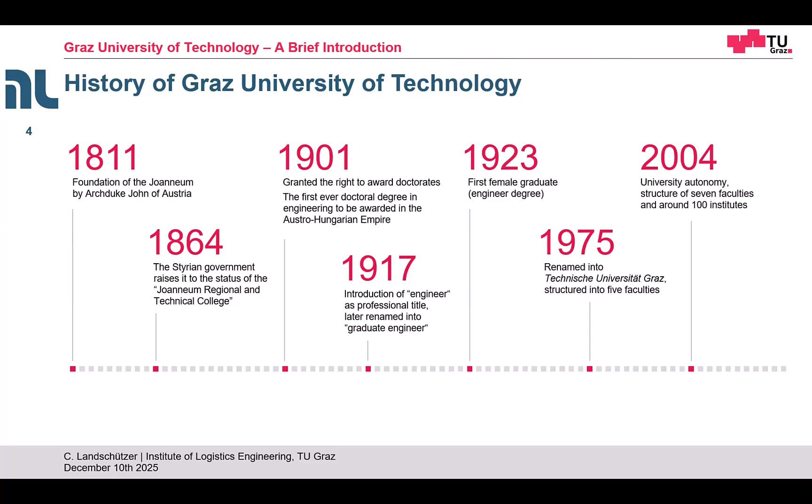We made some progress, and as you can see, we grew largely, being now 3,900 staff total at the university, with a federal budget of 209 million. That's, I think, a little bit, or much less than in Dortmund here.

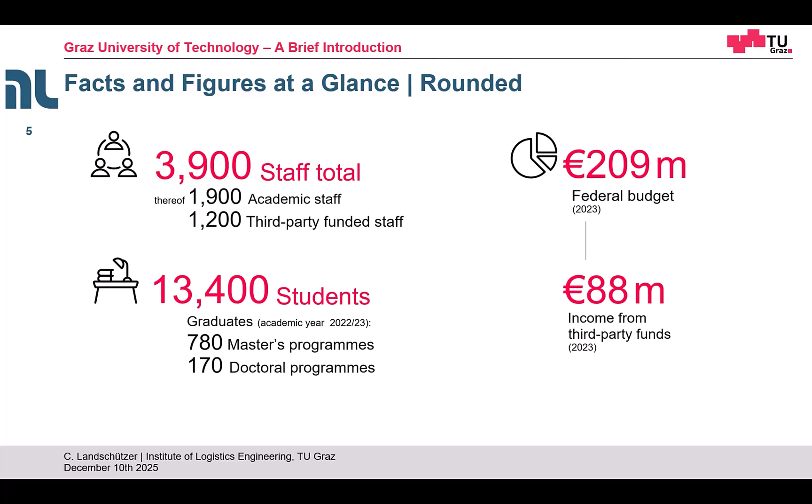But as you see a little bit later, we are a technical university, not a full university. So there are three more universities in Graz, two of them much larger than ours. This is split up in Austria. But in Austria, we only have two technical universities, and one of them is Graz.

What you can do when you come to studying, it's not so interesting for you. I think you're all beyond this stage. Many different degrees here, but here, this is the structure of the university.

We have 7 faculties, and as you can see now, architecture is maybe the most non-technical faculty here. The rest is informatics, construction engineering, machinery, and also some natural sciences.

From this mechanical engineering faculty, where I'm coming from, we have a lot of institutes, and here is this ITL - at least the logo is not the same as yours. We have different colors, but the same 3 letters. So this is our short history.

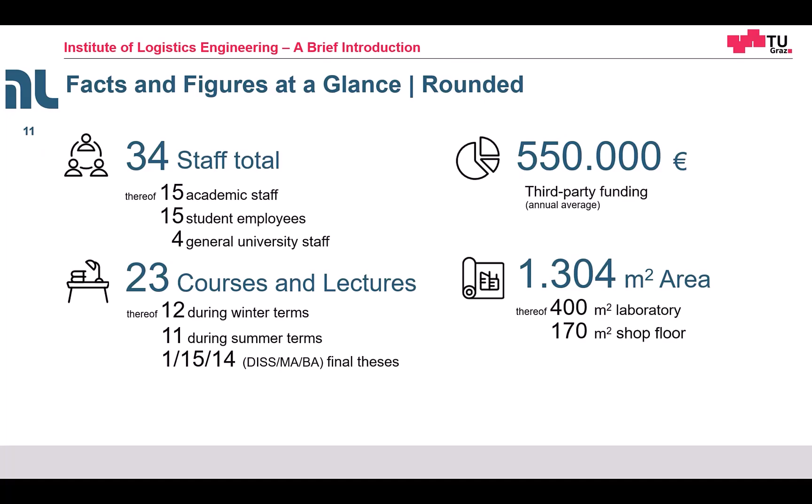Our institute has a total of 34 staff, a typical budget of €550,000 in third-party funding. Let me say, too many lectures because it's hard work here, and sometimes too little space. As you know, universities - it's always crucial to keep the space because everybody else needs it also.

This is what you can do in our lectures. Just a brief overview, not to avoid it.

Teaching is very essential, and I'm very proud to be honored - last week a colleague of mine did one of the best lectures last year. We got rank number 1 out of 4,000. It's lecturing.

From the university side, it's maybe not the same as research, but it's essential. We're here for teaching. We're here to motivate and to introduce people into science, and I think this is our DNA. Okay, so that's our institute and our understanding of logistics.

As you see, we are in the mechanical engineering faculty. We have a very focused mechanical engineering view on logistics, beginning on the structural level. Instead of the laser pointer here, I'm going to use the laser pointer from the computer. You see here? We're starting on the structural level.

This is all this network design, logistics and networks. This is why I'm here, probably today, for the rigorosum of Marius Delbrücke, from logistics modeling and material flow calculation. So that's the high-level view of logistics, going down to the system and up to the device level.

So we're the engineers that are engineering machinery, building machinery, selling machinery. As Graz, maybe you do not know, is one of the intralogistics hotspots in Europe. We have 2 large producers - I can say their names.

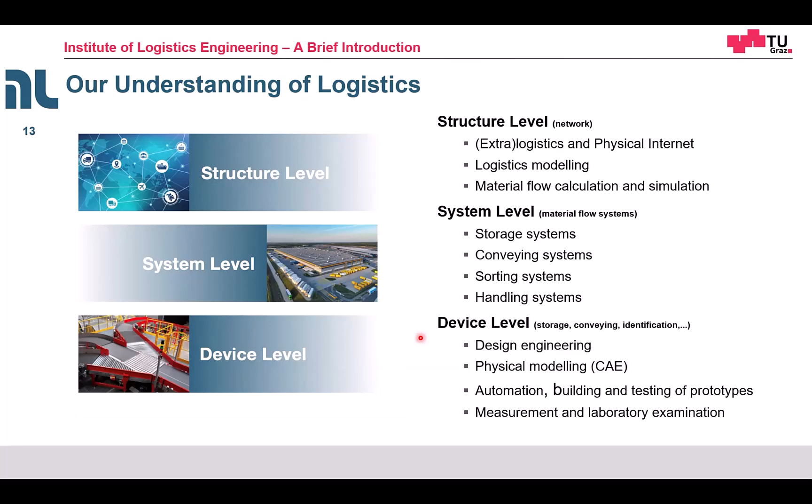And this is where we are connected on this device level. This is design engineering, modeling, automation, measurement, optimization, and of course also programming and IT. This is accumulating in 4 research fields.

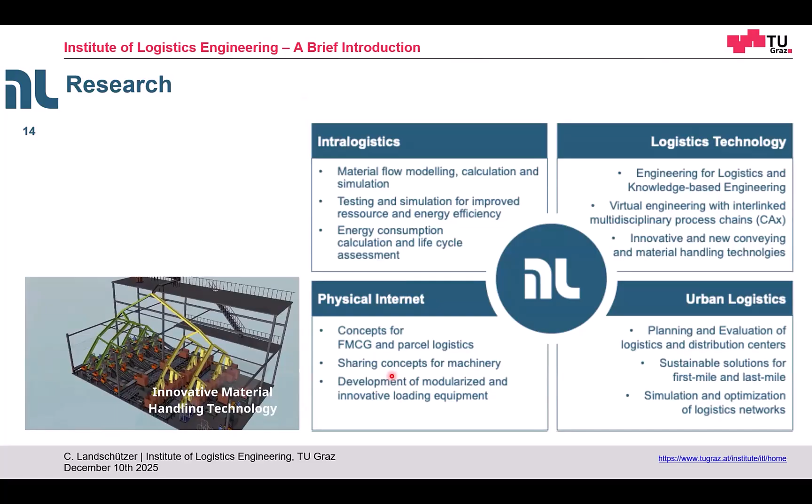Just a little introduction video running here by side. I'm not going to explain everything in detail, but my focus areas are a little bit more on the higher level - it's intralogistics and logistics technology here. With logistics technology, we have methods for designing and optimizing intralogistics machinery. This is closely connected to engineering and product development.

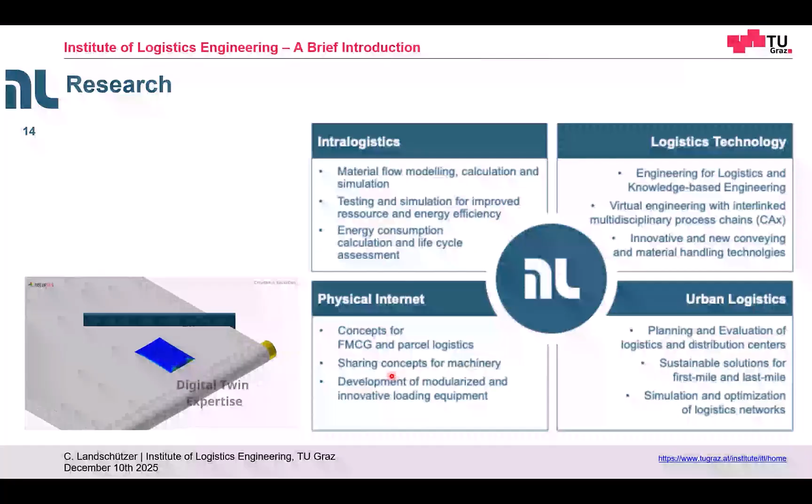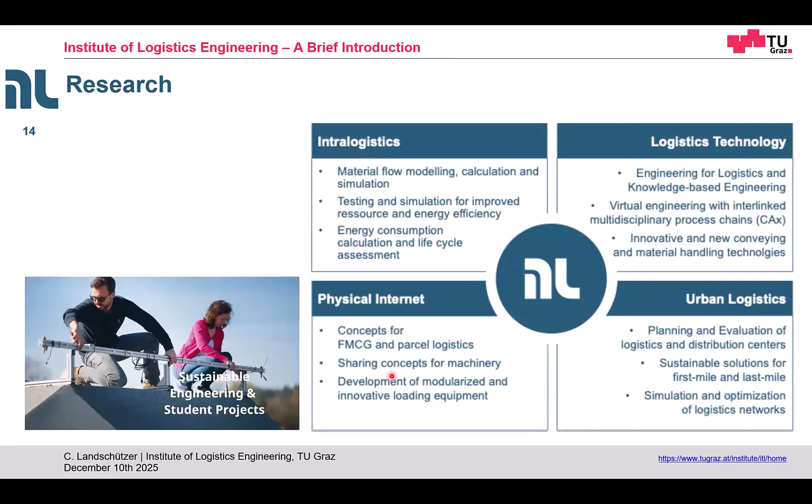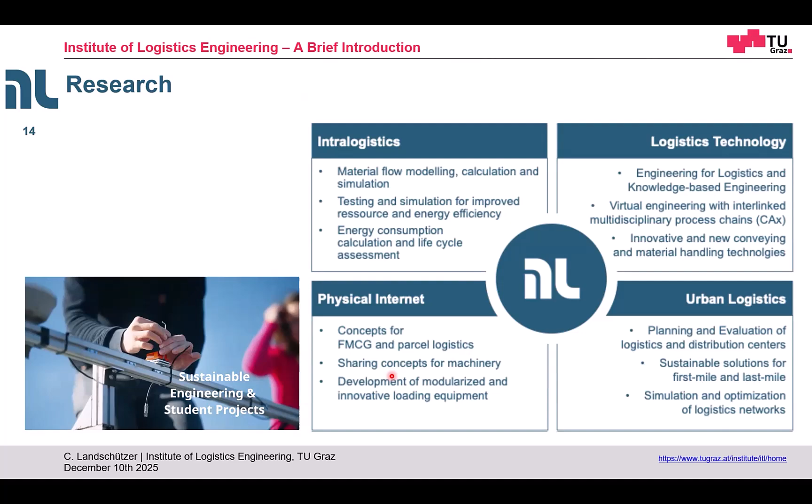Taking some synergies from the automotive and aerospace branch, which is also very large in Graz University of Technology, this culminates in intralogistics, where we focus on material flow modeling, testing and simulation, and energy consumption methods. What you see in the video, I'll pick out a few examples later so we can go into more detail.

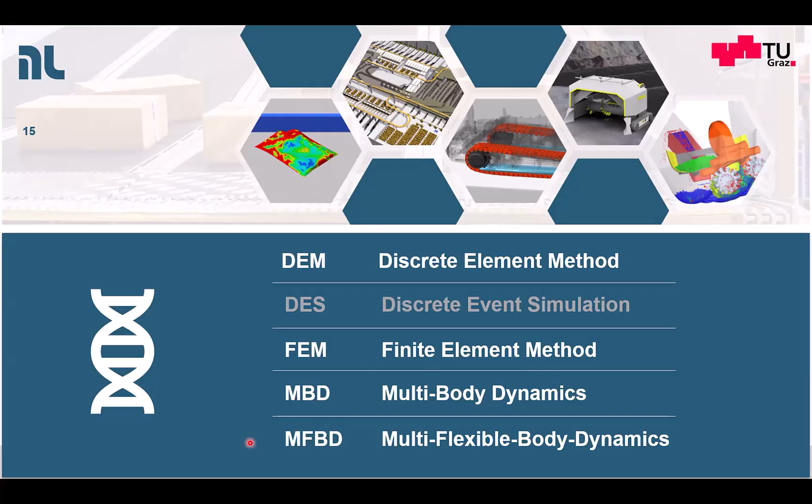So our DNA, and what I'm talking about today, is simulation and the virtual side of engineering technology. Some abbreviations I'll use: discrete element method, finite element method, multi-body dynamics, and multi-flexible body dynamics. This is essential to describe the physical side of moving goods - the acceleration on the good, the acting forces, how goods interact. We need all these methods to make virtual tests and build digital twins to optimize machinery.

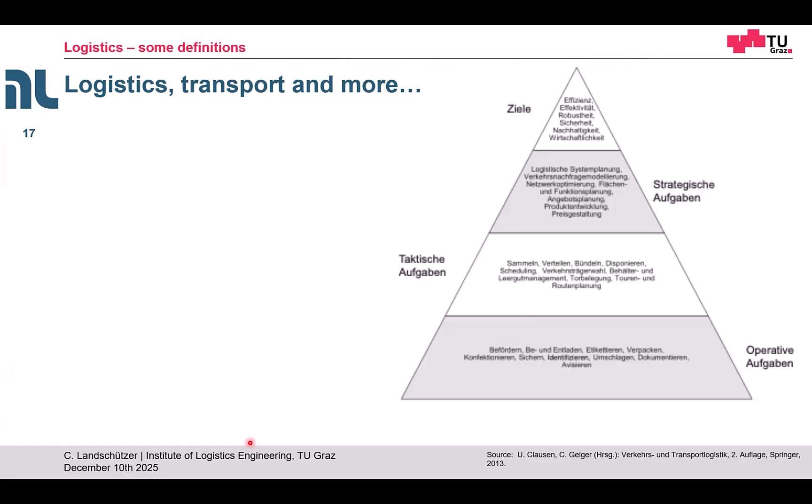Back to the title, Beyond Mass, Form and Transit Time. When we look at logistics, transport and more, I think every good lecture should start with some theory. I found a picture you may know, dear Uwe. What is logistics and what makes logistics? My view is, yes, as you wrote in your book, fulfilling comprehensive goals by managing strategic, tactical, and operational tasks.

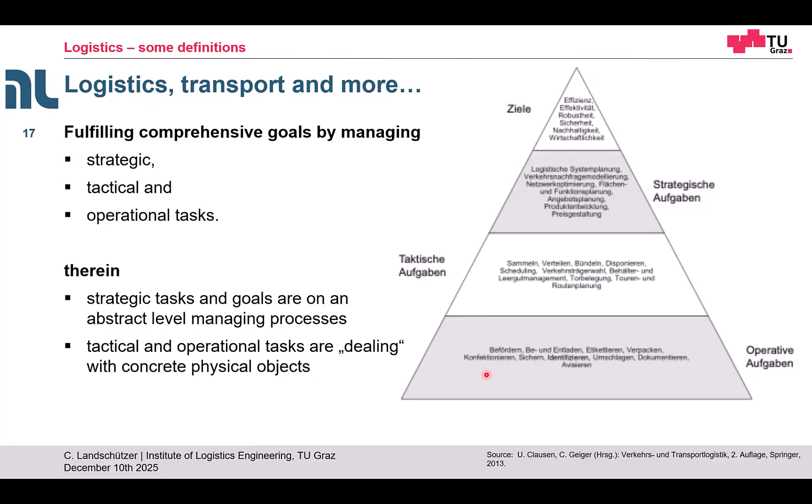But how we manage and deal with this task is a bit different, because strategic tasks and goals are on the abstract level, more a process view. Tactical and operational tasks deal with concrete physical objects. Here it's in German, but we have conveying, loading, unloading, packaging, handling, and so on.

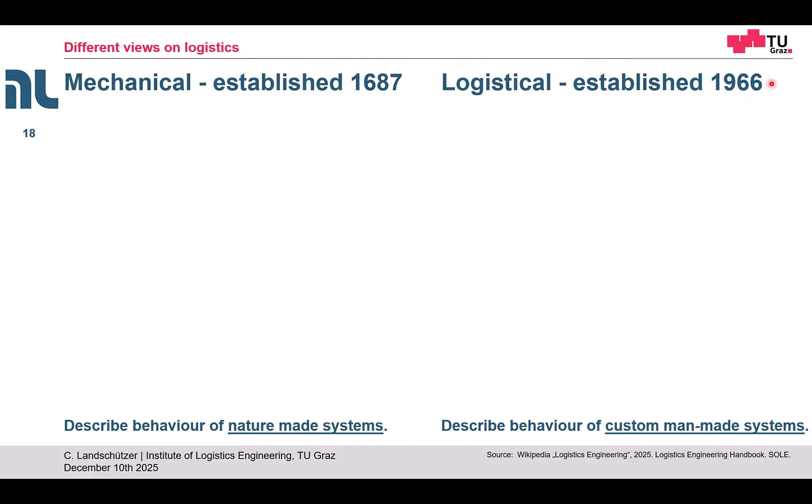Every time we have a concrete physical product that we have to touch and move somewhere, and with these different views we have on one side a mechanical view - I wrote down the number 1687. Any idea where this is coming from? Newton's laws, yes, 17th century. And I wrote down logistical view, 1966 - this was the founding year of SOLE, the Society of Logistics Engineers. This mechanical view and this logistical view on moving goods are a bit different.

Where the mechanical view is physics-based, we sometimes struggle to exactly describe the physical behavior of the goods because we have missing models. I can describe the movement if I let my presenter drop here, but if I want to describe the impact when it touches the floor or the table, maybe there aren't enough physical models behind it, or they're too extensive or complicated to use in detail.

So we have highly interdisciplinary fields here. We connect mechanics, thermodynamics, electrics, aerodynamics, and so on, because all these physical domains act on a moving body. We're talking about nothing more and nothing less than the physical moving body.

Software here has been used since the 1960s. This product, Adams, that I wrote down here, was developed for - what do you think - 1960s rocket design for the Saturn V rocket. So managing the dynamics of a moving rocket, this was the development stage of this software.

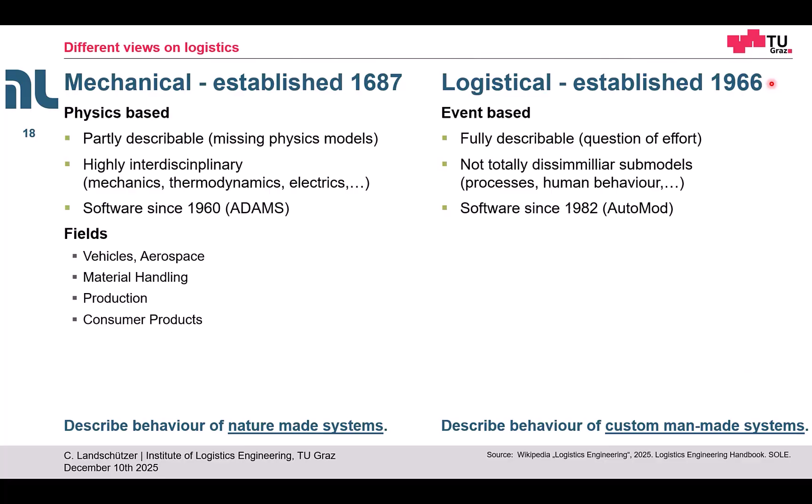With these fields, mechanical engineering, the mechanical view comes from vehicles and aerospace, culminating in material handling, production, and consumer products. On the other side, we have fields much broader on the logistical side, like customer service. This is from a logistics engineering handbook, and you're not expected to know everything written here - it's just a small view of what is covered by logistics engineering.

But we can take another point of view on this topic. Let's see what happens on the negative side - what's the impact if we do not handle mechanics in the right way?

We have probably still standing machines because something is broken. We have maybe sometimes serious injury, because machinery is not working as it should. On the other side, if a process-controlled logistical system is not working, we have probably uneconomic behavior, up to systems out of order. But we don't have this mechanical impact on this side.

And I think that's summarizing it a little bit. On this mechanical side, we describe the nature of the behavior of nature-made systems - this is all natural science. And we describe custom man-made systems, because it is designed only by our thoughts and not by the laws of physics.

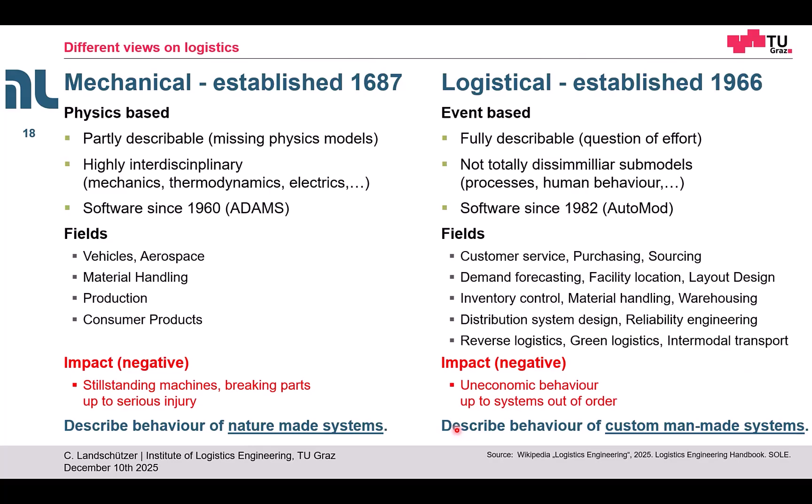Diving a little bit deeper into physics and physical modeling would mean to model the interchange and the atomic forces on a molecular level, if you have to describe the movement and interaction of any physical body with its environment perfectly. But we have to cut it somewhere, because it's important that it is handleable and that you can at least at the end solve everything you're going to model.

But I hope some pictures will tell more than 1,000 words now. You know the right side - it's a simulation of an intralogistics sortation facility, made in Plant Simulation, event-based simulation. On the left side, I have some physical simulation examples - what happens if parcels are on a conveyor, or what could happen. So if I only say it's enough to model that this conveyor takes 5 seconds from A to B...

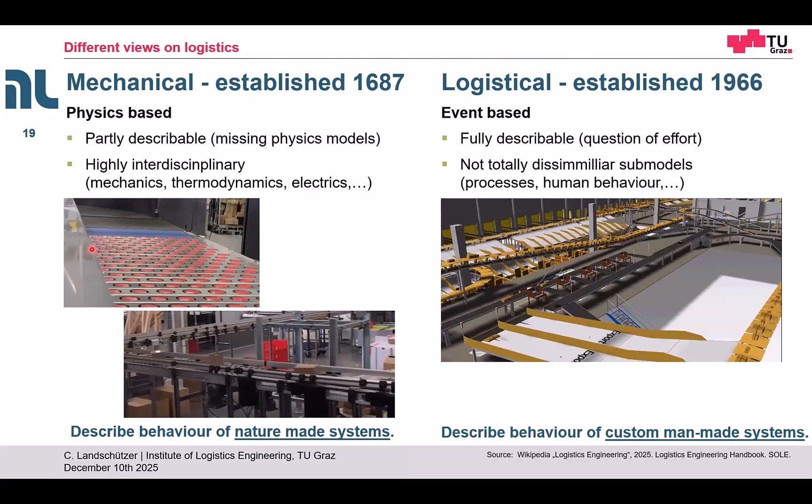Maybe something in between can happen - look at the behavior of this parcel here, the roller transfer. Of course it's reaching its destination, but it maybe takes some milliseconds longer than estimated, because you never modeled this physical behavior before. And yes, we're talking about milliseconds or 0.1 second. But if you enter a transit time or production time, you enter some digits and you have to know how accurate your time is, if you want to address and simulate the whole behavior accordingly at the right accuracy.

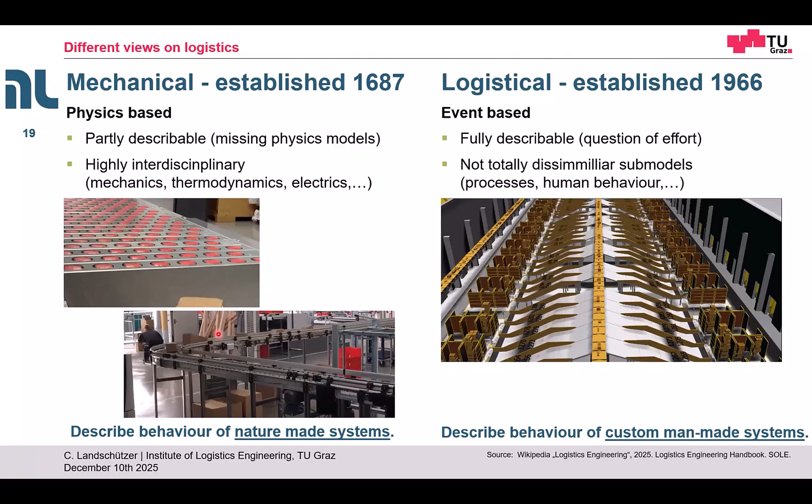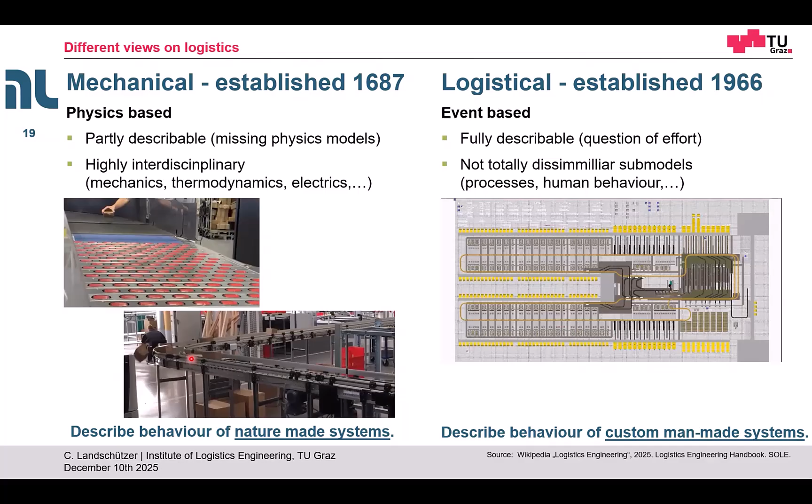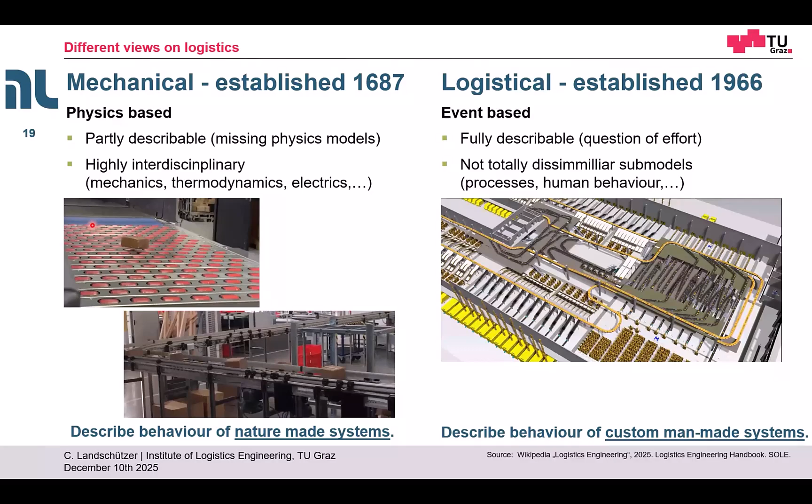Okay, the same happens on this transfer here. It's not a question of does it take longer or not longer - at the end it's not coming out right, because nobody designed this roller conveyor for packaging and parcels that look like this, nobody also designed this conveyor for some small consignments like this. So we have a large shift in parcels and packaging that is on conveying technology and handled with conveying technology. I'm going to show you a little bit more in some practical examples later.

Okay, so summarizing: dynamics and the mechanical view of logistics means a local and a global view on the behavior. It means we need dimensions, masses, inertias, elasticities, the dynamics of the moving goods, and we have the global interaction - elasticity, interaction, friction, and environmental parameters that all influence the behavior of a moving good. It's not important if it is a sea container or a small consignment from Courier Express branch - it is partly describable as accurate as necessary, but not fully describable.

And on this logistical side, we have an abstract view of a large network that is mainly characterized by arrival times and quantities. These are the physical entities you need here.

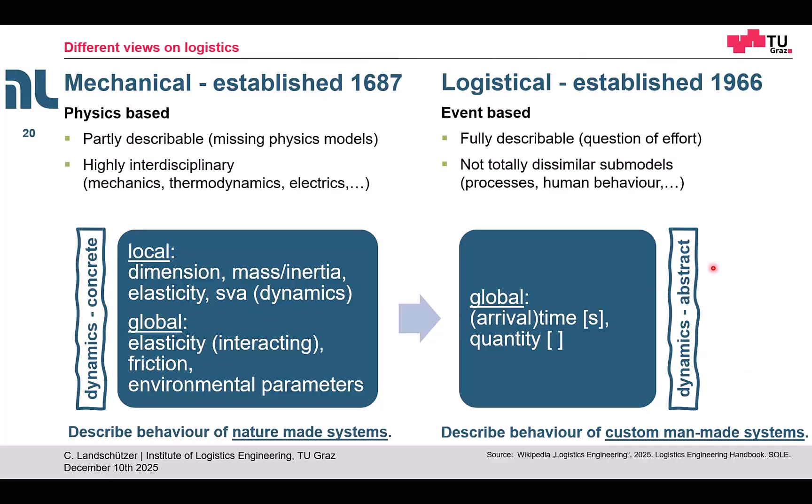Okay, so far so good. That's the theoretical part. I'm going a little bit more into details and showing you what I dealt with in my last 10 years, to make this mechanical side a little bit more solvable.

Yes, I took the approach to find the transfer of CAE methods - computer-aided engineering methods - from product development to logistics engineering. As you know, your consumer products, cars, planes, even trains are engineered at a much more sophisticated level than our conveyors, cranes, and material handling equipment. So I took this approach and showed these branches - what are your methods, what is your software, what is your approach to describe this behavior, and is it possible to make a transfer?

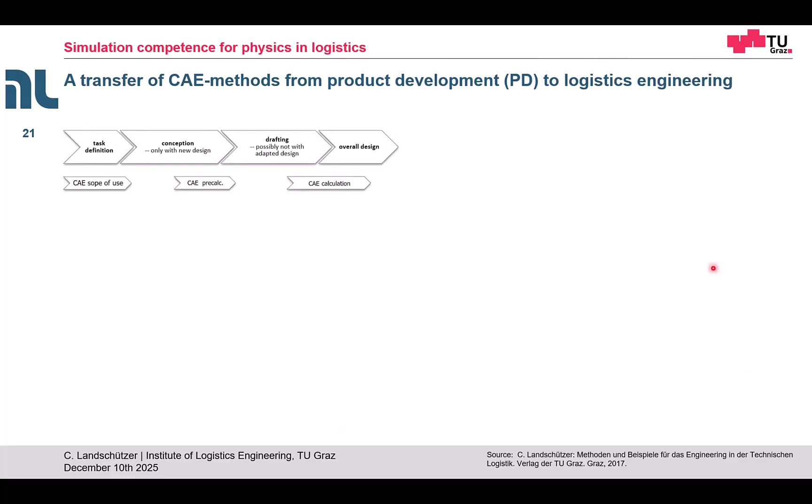Not to go into detail, it's just some excerpt of my work. And yes, there are some dedicated process chains, for example to build up digital twins for predictive maintenance, that are managing the complex dynamics of goods in product development and in operation, and to sharpen these essential parameters that you need when you take a more abstract view and develop some process chains.

Not to bore you with pictures, the sources are at the bottom if you're interested in how this transfers from trendsetter branches - I call them that because their product development is far more advanced than we are in logistics engineering. That doesn't mean one is better and the other weaker, but the effort is completely different. The engineering department of a large car producer is much larger than all the intralogistics producers combined, so we have a different level of theory and application of modern methods here.

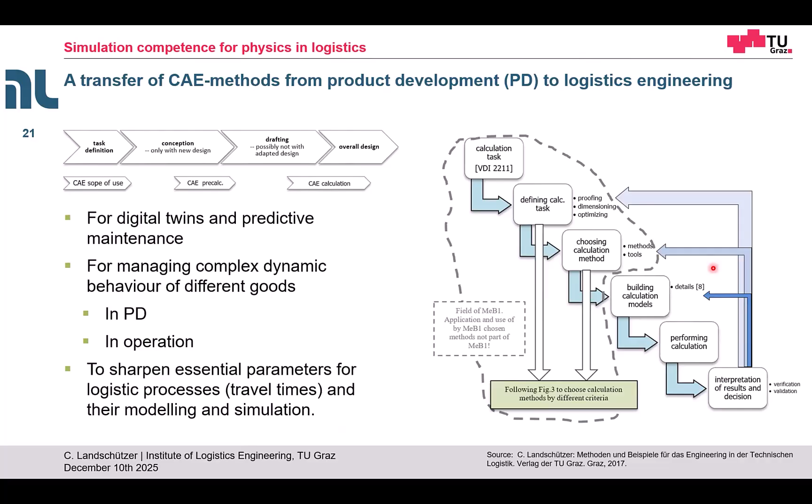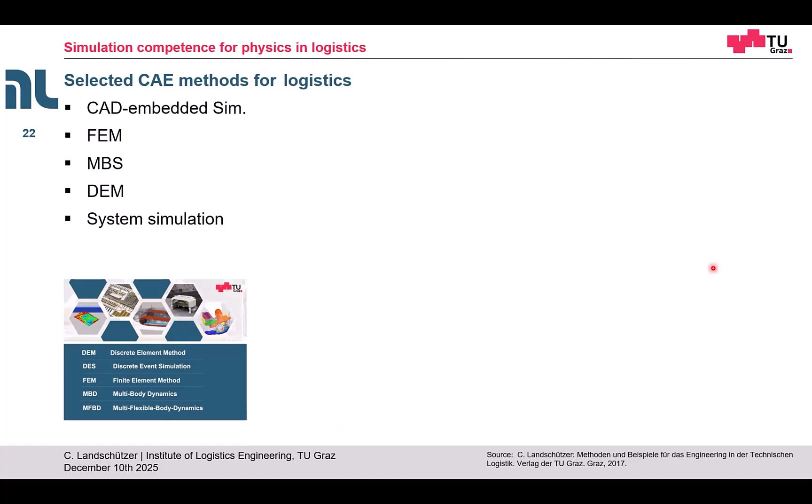Okay, some selected methods - I showed you this picture a little bit earlier, you probably remember all these abbreviations. But what are we going to do when we use these methods for logistics and for design of conveyors, material handling machinery, and so on? We have some challenges to handle.

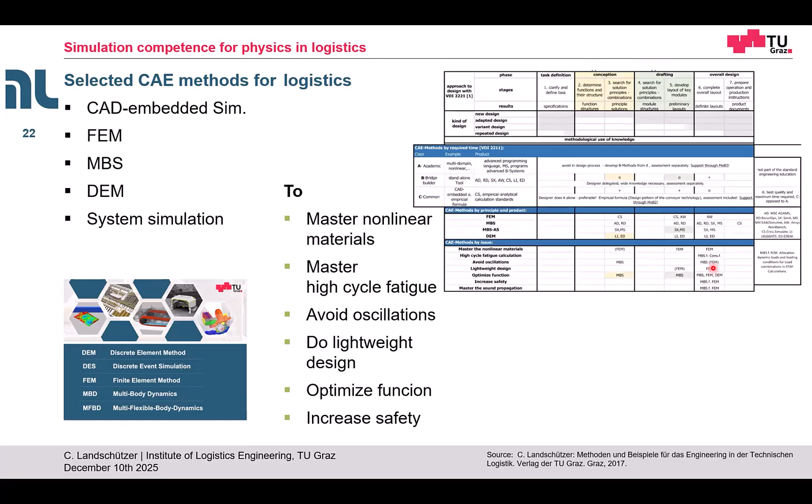We have to master non-linear material, and I'm going to show you what that means. Every consignment, every parcel you order is highly non-linear - the carton crashes, it changes its shape when you touch it. This is really hard to describe, but it's essential. Remember the jumping parcel on the conveyor - if I cannot describe the interaction, I cannot understand its behavior. And yes, we can answer this, and this is also out of my research, but I don't want to detail it here because I want to show you some examples.

My first example is from automated logwood handling. Austria is a country full of trees. Germany also has a lot of forests and trees, but we have a really big wood industry in Austria.

What this has to do with logistics is, you have to bring the trees out of the forests to the sawmills or to the producers. And there comes the topography in Austria - it's mountains, it's winter, it's hard to harvest them, it's hard to transport them. You have to load them, you have to unload them. And there is much potential for automation because we have a task that is highly risky and very dangerous.

This logwood handling is highly risky, physically demanding work, and we have a shortage of workers. We have this very dangerous work, and therefore high potential for automation - not only for the handling, but also for the self-driving truck into the forest.

There are some ongoing research projects at the institute - just last half year we ran a large project called COMET. It's one of the largest Austrian research projects, where we're dealing with the complete truck, how you can handle these logwoods automatically.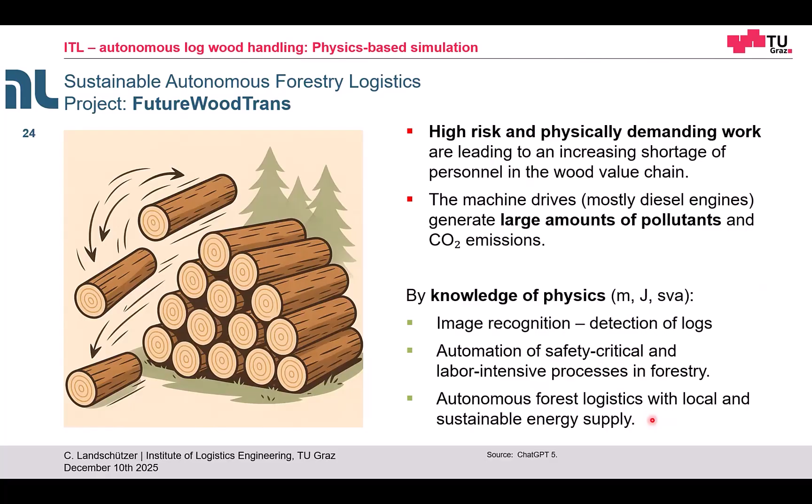We need automation of safety-critical and labor-intensive processes in forests, and we do autonomous forest logistics if we can describe all this physics. This is what I'm showing you now - this is a typical loading process.

Now, a question for the auditorium: where is the difference? The most essential difference, of course - this one is a picture, here is a simulation screenshot, but something is missing at the right side. Yes, thank you, of course - the operator here is missing, and the cabin is missing, because the crane is doing this work automatically.

Not to promise too much, we can do it now - we are not as fast as the good operator, but we can do it. And at this time, when we are doing it, the operator can do something else - having lunch, or going to cut the next tree in the forest. And that's where this great automation potential is settled.

But why is the physics so important here? You see this crane - it's one of the biggest producers of logwood cranes, it's called Palfinger, maybe you've heard of them. It's an Austrian company.

They're producing for the whole world, and the market is really international. Modeling this crane is not as easy as it looks like. You can build a model, but then some questions arise.

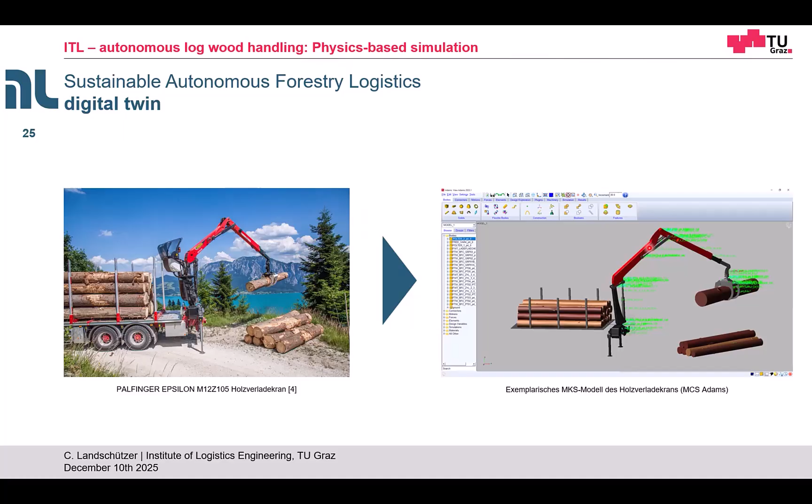What about this hydraulic cylinder here? How is its behavior, for example, when the oil is cold, when the oil is warm, when the oil is fresh, when the oil is not fresh? How is the behavior of this beam here? Is it rigid or is it elastic? All has to be considered in such a model.

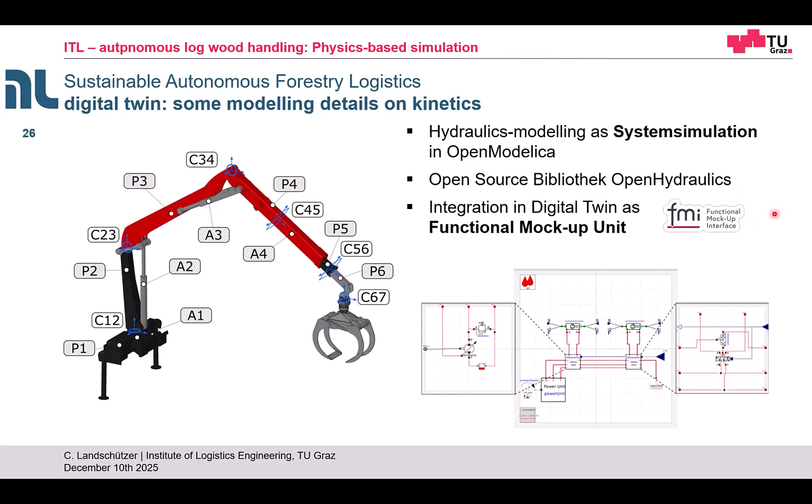Just some insights here on a very high level view. You see here all moving parts in this model, and the connection to the hydraulic simulation model. We have a key technology here, the functional mock-up interface, that connects different simulation domains. Remember, we talked about physics, mechanics, aerodynamics, thermodynamics, and so on. We have to connect them all. This is very well possible with the functional mock-up interface.

And we're going much more into detail. We are introducing non-rigid bodies here, because one of these logs has 400 kilograms. The crane picks up 2 or 3 of them, and it deforms elastically. We have to consider it, because if it's bending and I don't know how much it's bending, I never hit the target. So I have to describe this, and this is possible with modern engineering methods, but it's a question of effort — it's very time consuming and calculation intensive to make these simulations.

Some software products just mentioned here: MSC Marc comes from nonlinear material simulation, and it's very appropriate to model, for example, the behavior of this crane. But the key is in reducing these models. As I addressed in the beginning, it's not possible to model it completely or exactly. So we have to cut a certain layer and decide how much of this behavior of this very complex structure is interesting for me, and how much I have to consider so that the whole automation process runs.

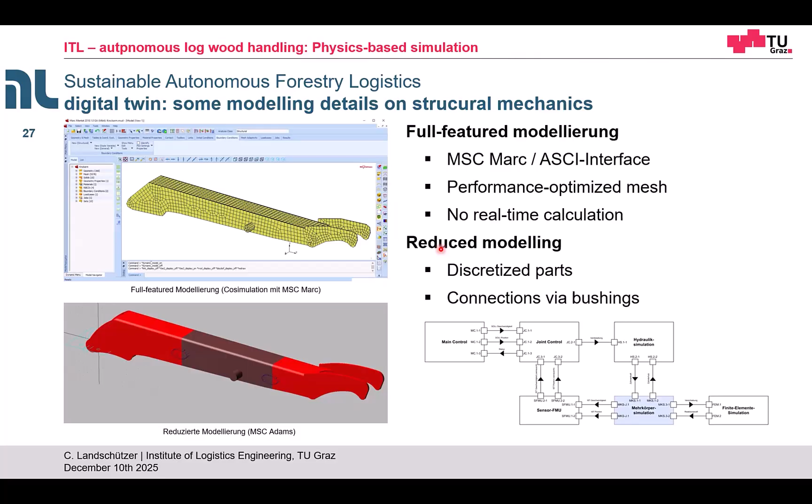Here are some insights into what we built in the control algorithms. It's not as sophisticated as what's behind it — this is the whole combination of different simulation domains, where this gripper here does its first movement on the screen.

Transferring it to the real operating crane is the other challenge. But this is one of the main advantages of virtual engineering: we can test much of our equipment, our processes, and our behavior on the screen. And it's not only faster and more performative, it's at the end more safe.

Because when we turned on the automation the first time on the crane, it made like this, and the exit button did not work. So we disconnected some of the computer cables so that it stopped again, because all this testing should happen on the virtual side.

You see the loading process here. You can tell me, okay, my computer animation also does this, and I have a computer game that looks like this, and it's the same.

We are not talking about visualization, we are talking about simulation. For me, it's important how large is the force here and how large is the acceleration here. It has not only to look good — it's the difference to some computer games where you see all these moving parts, also very performative running, for example, on your smartphone.

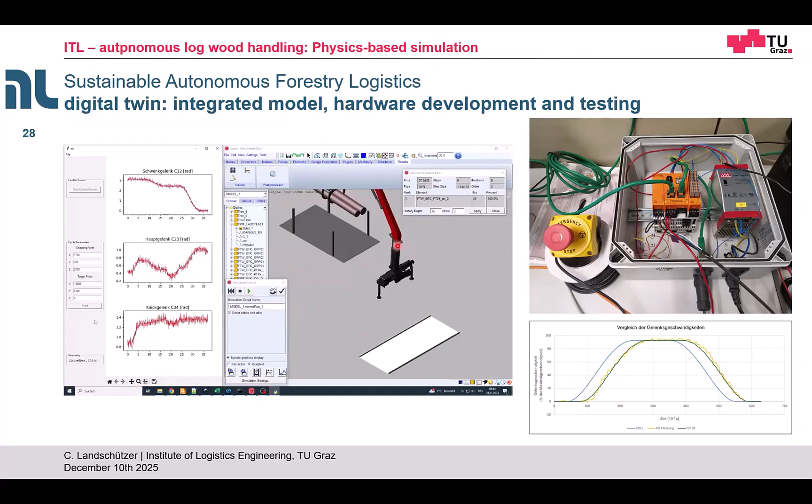This needs high performance computers, and I think this simulation model runs for 30 hours or more only to make one turn of this crane here.

He can do the work in the forest. He can do other work. What is his intention and what he is usually used for.

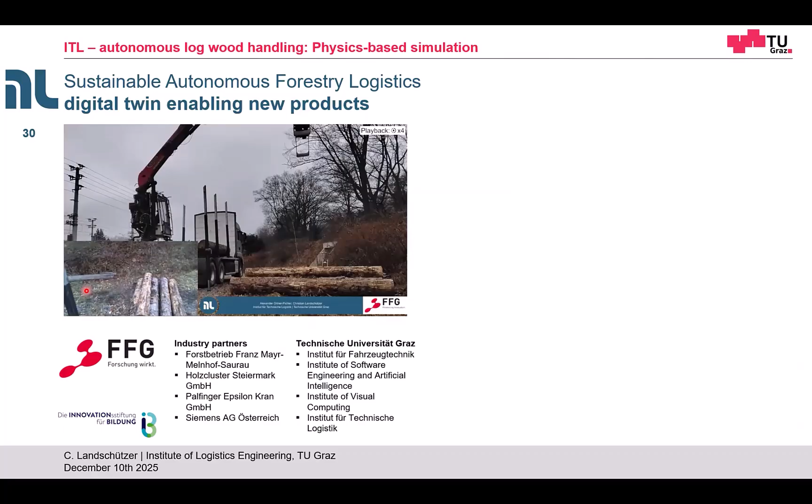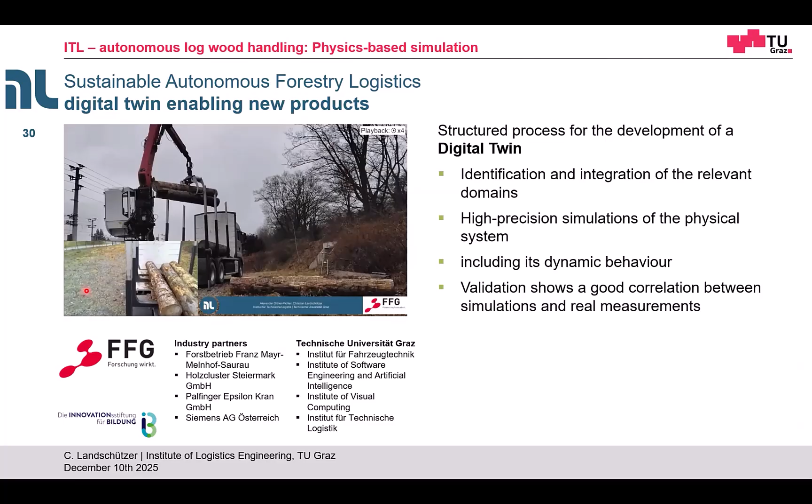So we developed in a structured process a digital twin, not only for the engineering and development process, but also for the automation process and software control at the end. This makes the process much more efficient, avoiding dangerous operations and using skilled workers for the skills they are usually employed for at the producer.

The digital twin here is a powerful development tool, reducing development time and costs, with early identification and correction of errors. I spoke about this turning crane - we did not find every error in advance, but we found many of them when we tested the automation.

We can simulate much more scenarios on the virtual side than in the forest, because we have more time, can use more computers in parallel, and have more abilities. The test stand is very expensive - we have to run the truck the whole time, and the truck cannot work in the forest at the same time. So once the model is ready, we have a big advantage.

What's the overall advantage of a digital twin?

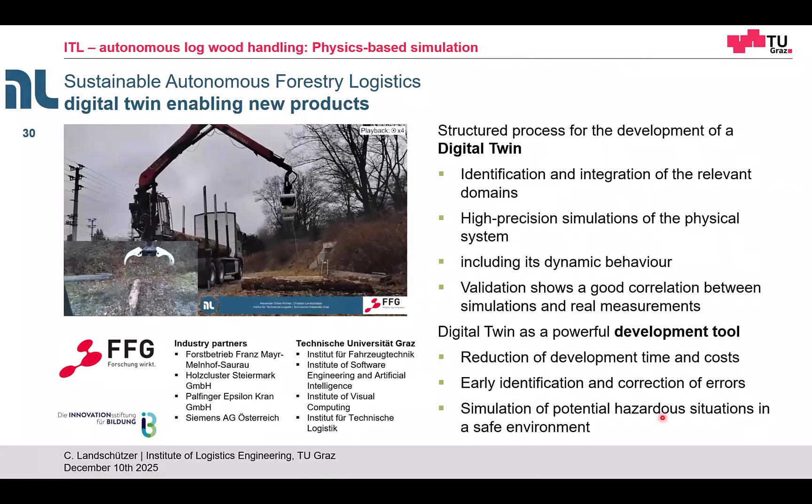My second example is about automated biomass handling. We're staying in the area of cranes, but moving from logwood to wood chips now. It's a Horizon project we have at the Institute. I'm not talking about all this in detail.

It's thermodynamics that involves burning wood chips, a very innovative process with a novel updraft gasifier connected to a heat pump, connected to gas reformation, using the ash as fertilizer, and so on. But that's not my domain.

My domain is providing this gasifier with fuel - we have to grip the wood chips and bring them to the burner. Conventional conveyors take what they get: you have the storage bunker filled with wood chips, and at the bottom you're pulling out what's lying there because you cannot choose. That's the conventional technology.

We found another approach, which I'll show you with a gripper, but we must also know some physics of our goods - we must know the mass, the humidity, and the ash content to provide the right quality at the right time with the right product.

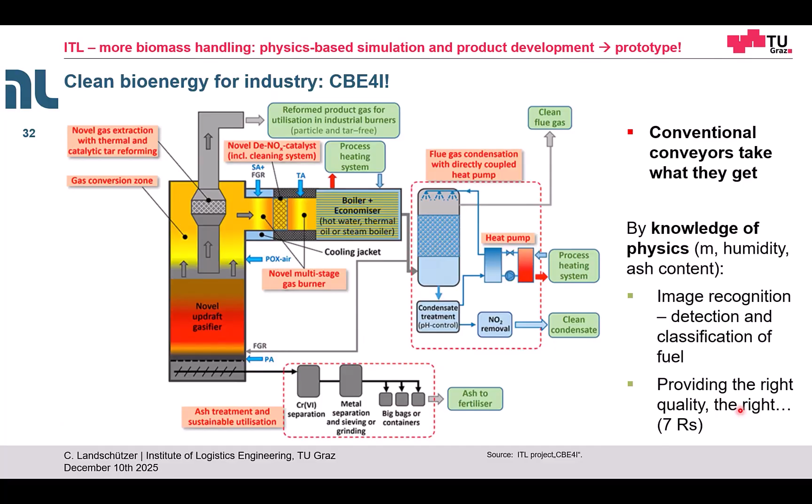Everybody knows that's a classic example. Instead of pulling out the wood chips at the bottom, we pick at the top, but we choose what we're picking because we can measure. Here is the good material, here's the wet material, here's the less good material. Let me show you how we're doing this.

This here is the automated gripper. It has a camera and a humidity detection system, and we have different storage bunkers. We grip from the top, we measure, and we sort. When the burner is not working at full operational load, we can use the gripper for sorting the material.

You never get homogeneous wood chips - you have material from one forest, from another forest, from one supplier, from another supplier, all different quality. But if you provide the burner with the right quality, you can improve the overall efficiency, the ash content, and all the emissions, because you can bring the right material for the right operational stage. For example, in full load you can burn everything, but in partial load you need the good material and you have to choose. This is what we're doing with this automated gripper.

This is done through the knowledge of physics, which is a little different here - the physics here are humidity and ash content. Maybe it's more chemistry than physics, but measuring this is the key of this automation concept. At the end, we developed this automation of the crane and the algorithm for how it mixes together to provide the right quality to the burner at the different stages of combustion.

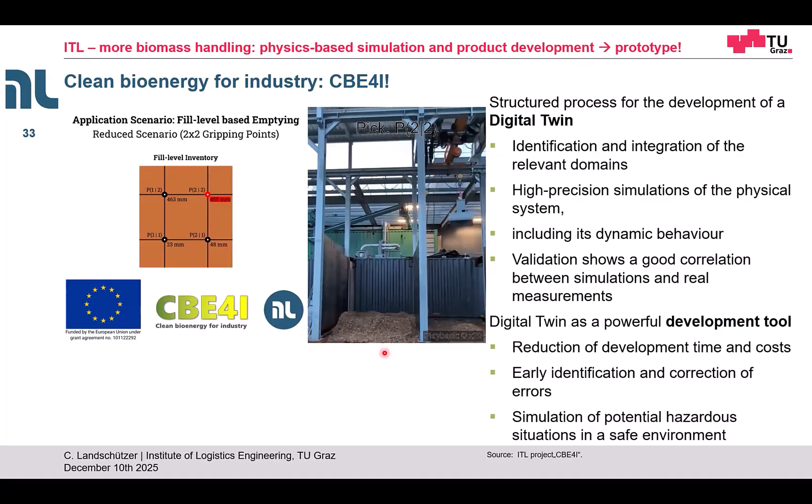My last example comes from the Courier Express branch and describes the dynamics of consignments, shipments, goods, parcels - call them how you want. If you look at the literature, you find many different words describing the same thing. For us, it's a parcel, or what you ordered yesterday. Why this is so important, I can show you in the next few slides.

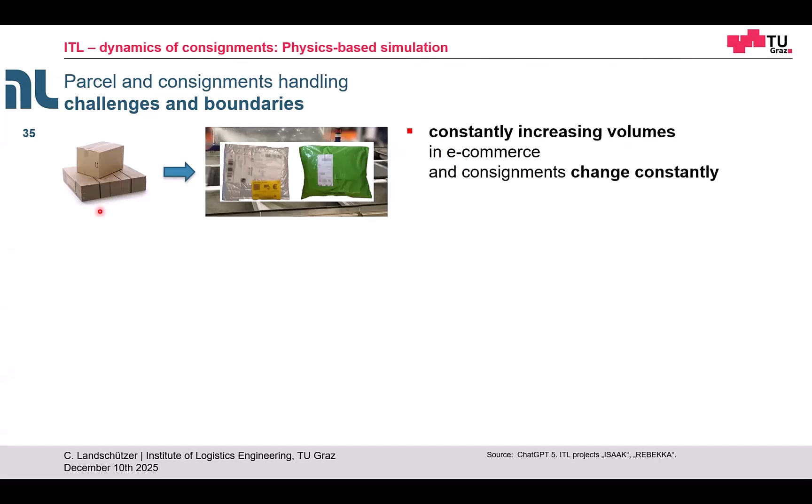With all this e-commerce boom, we have constantly increasing volumes, and the consignments change so rapidly that we cannot even describe them with words, let alone physics. Nobody knows how to name this parcel, the green one. Some say polybag, some say flat, some say Tüte, some say Plastiksackerl in Österreich. Some years ago, a parcel was a parcel - it was a six-sided carton.

And we have now dramatic change, nearly in a half a year cycle, from one consignment type to the other. I asked ChatGPT again to draw me a picture of loading and unloading parcels and sorting them - a little more interesting because they're dropping down from somewhere out of the truck, but it used different parcel types. This is why I used it here for my presentation.

But why is the knowledge of physics here so important, and which physical parameters do we have to know? First, like everybody would assume, mass. Mass of the consignment is what you're paying for. If you go to the postal office with your shipment, they lay it on a scale and say, okay, X kilogram makes so much euros.

But there is something more. For example, J is the moment of inertia, its resistance to movement. It's something more - what about the flexibility of the parcel? Some years ago, parcels, I told you, were cartons, and cartons were treated as perfectly stable, or elastic. But these consignments are not elastic - once you touch them, they lose their shape and never return to the same shape.

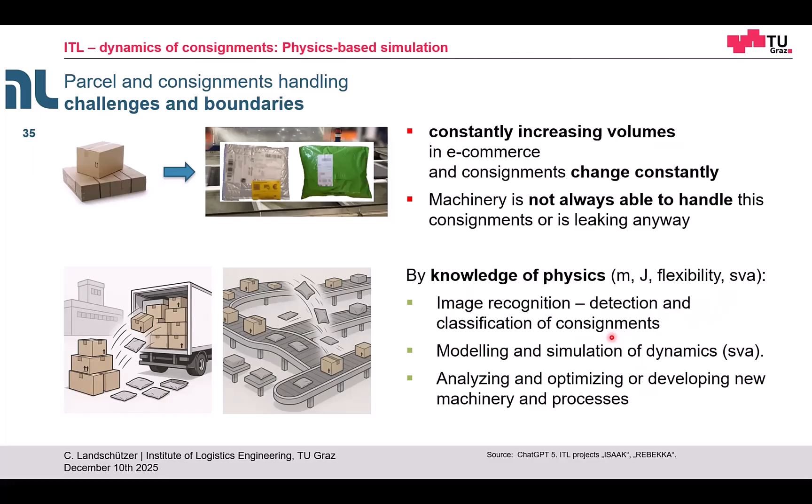This is non-linearity. So if we want to provide all the processes with image recognition for detection and classification, if we want to build new optimized machinery that has never existed for handling consignments like this - because existing machinery was all developed for six-sided carton puzzles - we need to describe the physics. We have now our third research project in Graz describing the physics of moving goods, and I hope my next pictures will show you what I'm speaking about.

That's what Courier Express companies have to deal with - those are polybags, as we call them, and we defined in a research article what a polybag is. They come as bulk material - you have a container full of bulky polybags. You load them out onto a conveyor, and what's the behavior of this bulk of parcels? Nobody can describe it so far.

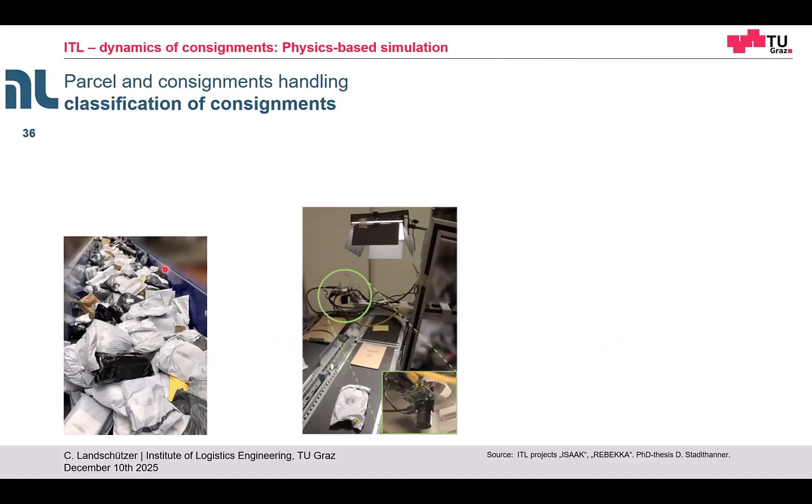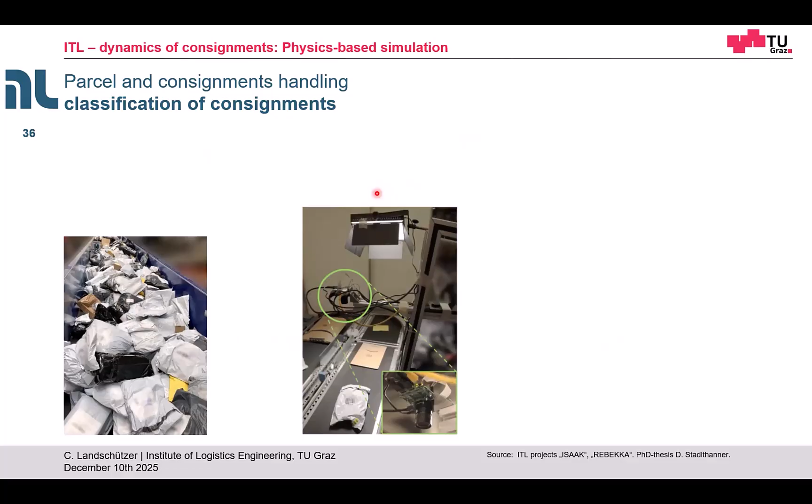But when you want to design it, you have to classify them beforehand, because not every polybag is non-linear in the same dimension - one is more rigid, one is more stiff, one is perfectly linear, one is non-linear. This is our first approach here: we developed an algorithm to classify shipments. This is what came out.

We classify them by shape, by dimensions, by another shape parameter, and so on. It's just one side, but you see here the different examples of shape when you have to classify them, and we do it by image recognition. We trained an algorithm to distinguish between carton and polybag, flat and round, and so on, so that we can say, okay, in this bulk I have X polybags of polyurethane, for example, and Y polybags of flat carton. This classification comes before optimization, because the physical behavior of these classes is highly different.

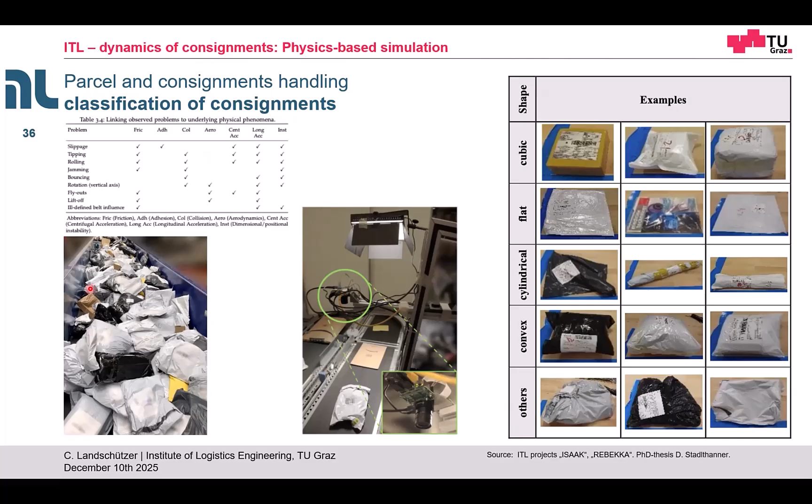This is one picture from the ongoing PhD. One of my candidates is going to finish next week.

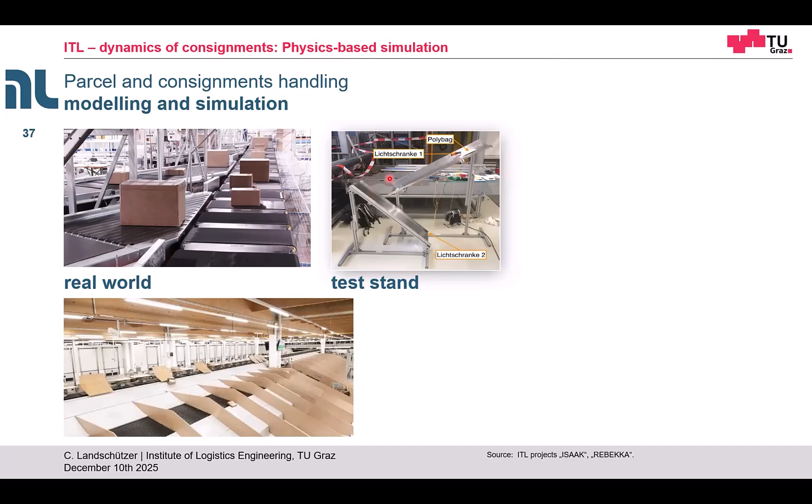Okay, so that's the real world. You all know that's a sortation center, cross-belt sorter here and some chutes here at the end. We built a test stand to model the physical behavior. It's a very simple test stand, only testing the friction and to analyze this impact if it touches another conveyor. And then here is the real big virtual world.

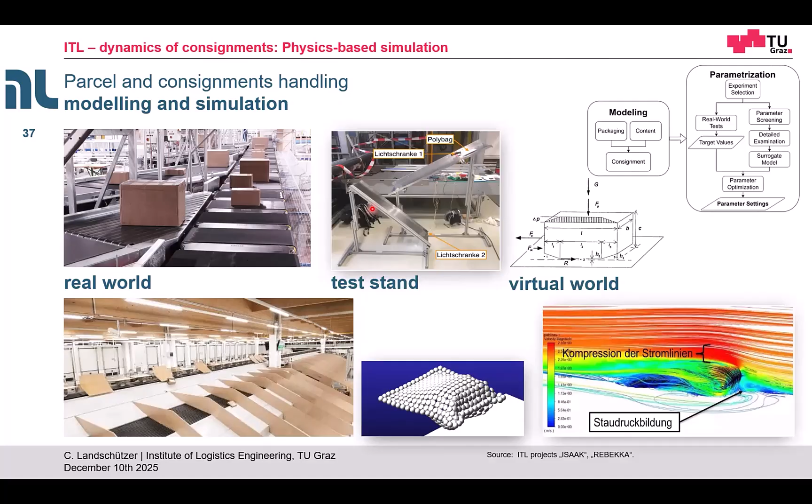What do we have to model and how good can we do it? I'm not showing you the details now because this is much too complex and I'm not into the details. These are my PhD candidates, they're really good in this. But I'm showing you the...

impact of this modeling. Remember these jumping parcels on this roller conveyor, the red one from the beginning? We can now in simulation and in the test stand really exactly describe the physical behavior. And yes, every second counts, and it's not the same if it needs 1 second or 1.1 second, because there is a difference. And if you do not model it in this logistical domain with the physical knowledge, you cannot describe it as exact as it's necessary.

We can describe the behavior of these flexible bodies. See here, okay, this should start here with one moving parcel. We have now 4 moving parcels here. All this is really, really time consuming. This simulation runs for, I think, 70 hours or longer, and it's only 4 parcels.

Remember these chutes full of polybags, hundreds of them. To simulate them, we are using some reduced approaches. As I mentioned in the beginning, not to model it in the last detail, but to model it accurately for the interesting purpose and for the modeling purpose.

Okay, here in RGB colors shows the flexibility and the resulting stress on the parcel here. Yeah, it describes the behavior.

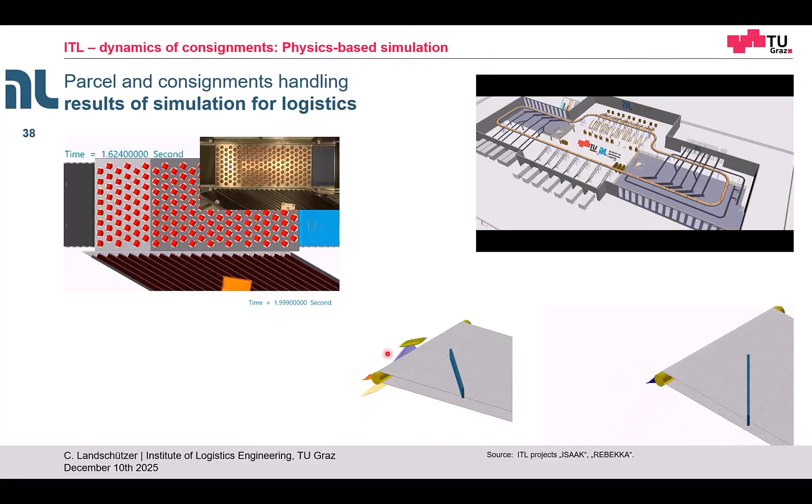The last simulation, and the colleagues came back from a test run in Nuremberg. We're working together with Körber Industries and the Austrian Post here on this project. They did it with 10 parcels now, modifying, simulating, and analyzing the differences between experiment in the field on the test stand and simulation at the other side. And there are real good approaches here to model this complex behavior.

But where does this result at the end? One interesting side aspect of all this modeling was, we do not only have to handle on conveyors the parcel, we also have to load and unload trucks. And one very good example, you see a little spoiler here in the last time, what I'm going to show you in my last minutes here is, yes, we developed an unloading device for parcel trucks.

All your Christmas presents in parcels from e-commerce are loaded and unloaded manually into a truck and out of the truck. And I did it for a few hours in a sortation center, and I can tell you this is real hard work. To unload a complete truck in 1 hour, it's around 30 tons of parcel you have to pick and place on the conveyor. It's real physically hard work.

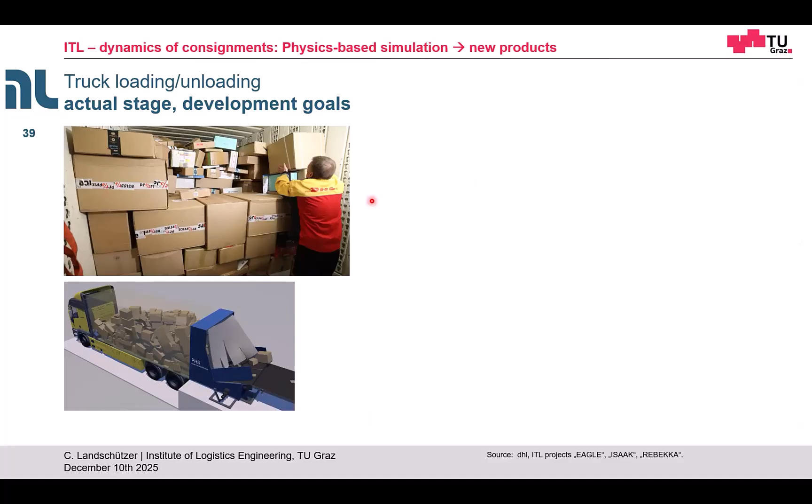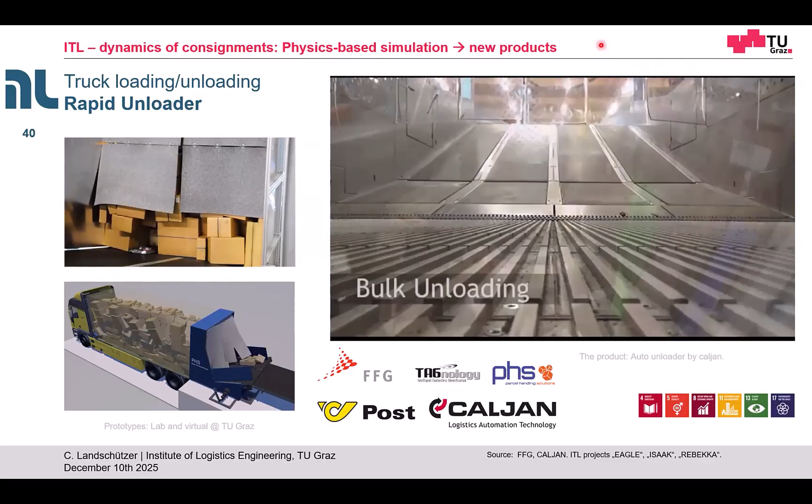We did not solve the loading problem so far, but we solved the unloading problem, and I think this video shows more than my words. We developed a new swap body, and this swap body contains a moving floor that is pulled out and directly connected on the conveyor technology of the sortation center.

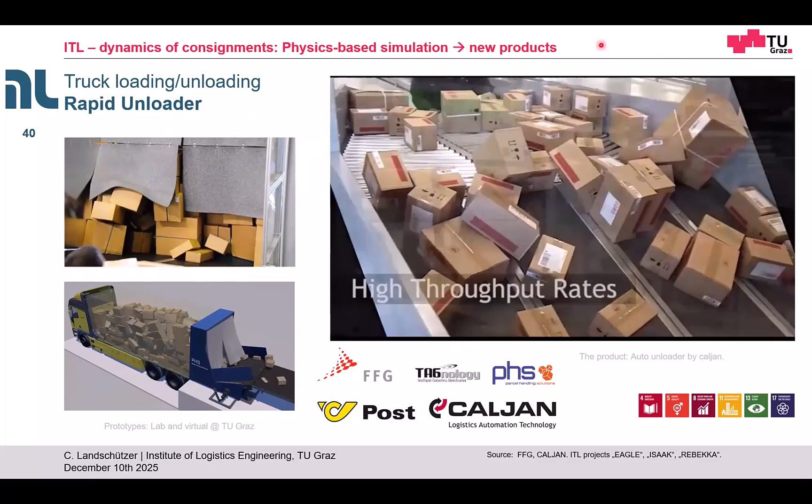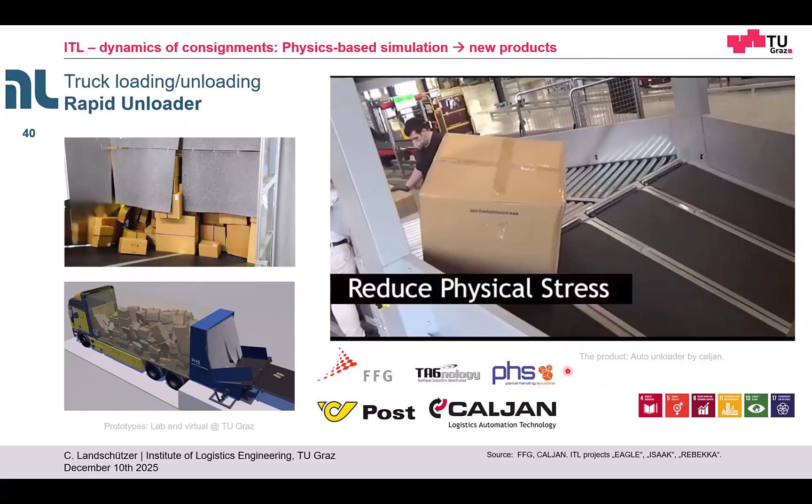There's a video that 6 of these installations are running at Austrian postal hubs. It was a former startup, PHS. It's not in operation anymore. These were my 2 doctorate candidates 10 years ago. Together with Austrian Post, they founded this startup. They got sold to Caljan, maybe you know them, it's a big producer of conveyor technology. And yes, this product is on the market.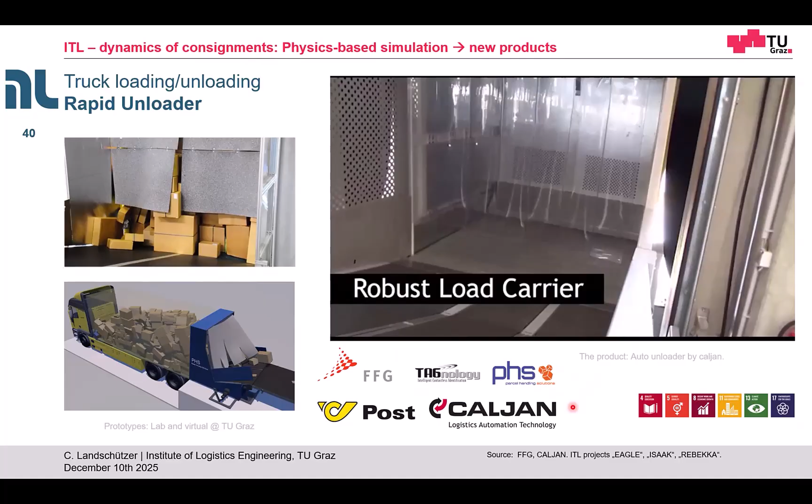It's now called Auto Unloader. You can buy it if you want, and you have a sortation center at home or have to unload a truck every day. What's a great advantage?

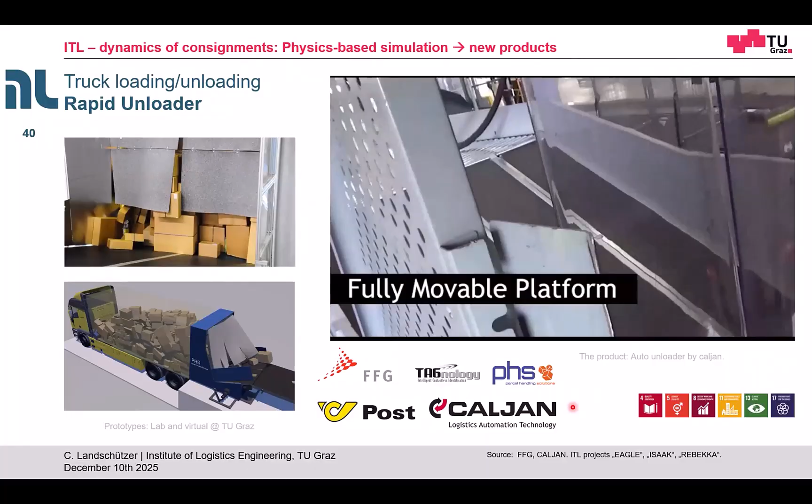You can see here in this video, this blue device connects automatically to the truck. It recognizes the truck, it knows where the truck stands, and it pulls out this moving floor. And one of these blue devices can operate many doors at the same time, because the unloading process got about 3 to 4 times faster than the manual process.

Yeah. And at the end, you do not only have this advantage in time, but you have also the advantage that you know which parcels are coming, because it's fully camera observed, and you know which types of parcel. Remember this classification scheme can say, okay, I have X polybags, I have X cartons. You can bring this into the control, into the system of the whole operation of the sortation center. And it's a real nice product. We are very proud of.

Yeah, it started with some simulation. And honestly, this video, what I'm showing you here, it's not simulation, it's visualization.

It's from Cinema 4D, a complete visualization software. But of course, we started after this promotion video with describing this physical behavior, because it's important to know it. The parcel should not drop too much, and you must calculate how many parcels you can unload in the right time.

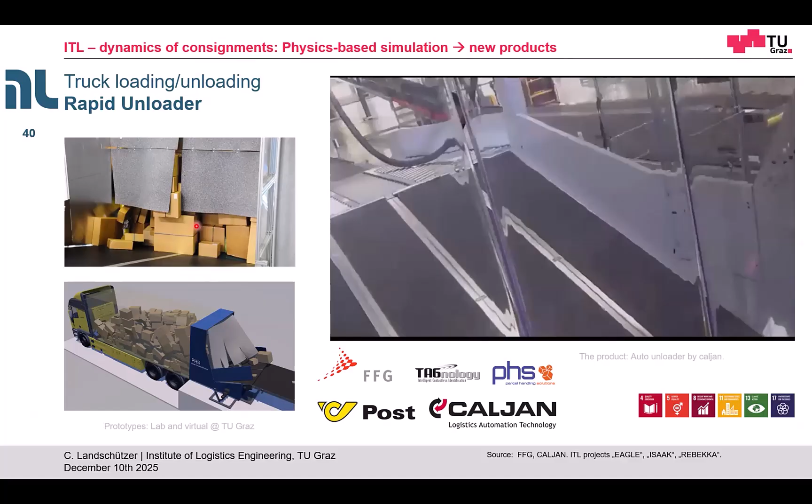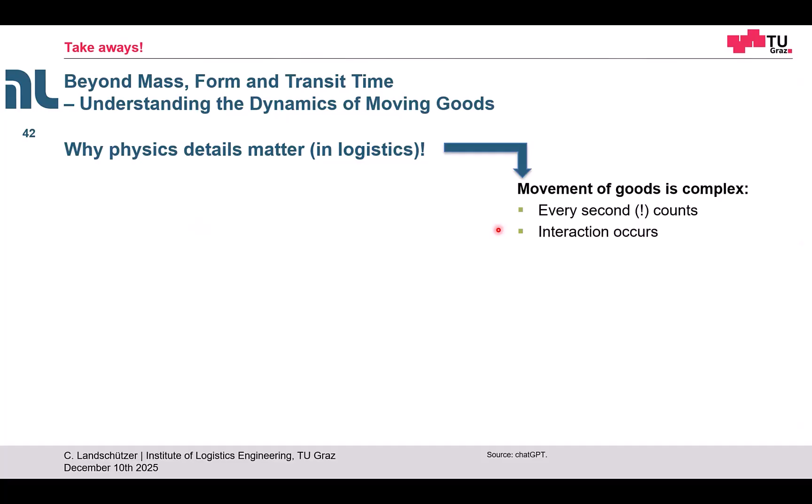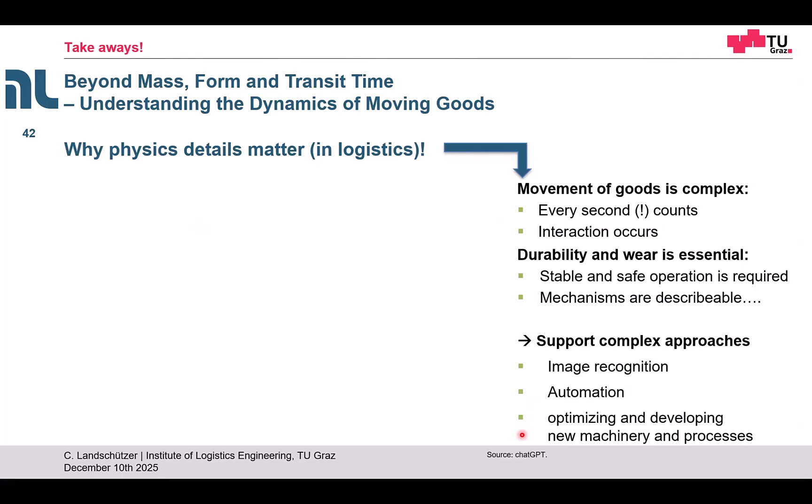Interaction occurs. All this bulk handling of goods shows that not only one good is to describe, and that interaction occurs. Durability and wear is essential. We need safe operation, and we have to describe all our mechanisms here. With this virtual side, we can support complex approaches like image recognition. It needs to know where the center of gravity is. We have to provide automation with all these physical details. The ash gripper has to know how humid and what is the ash content of the biochips. And we use all this, where these tools are coming from, to optimize and develop new machinery and processes like these unloading devices.

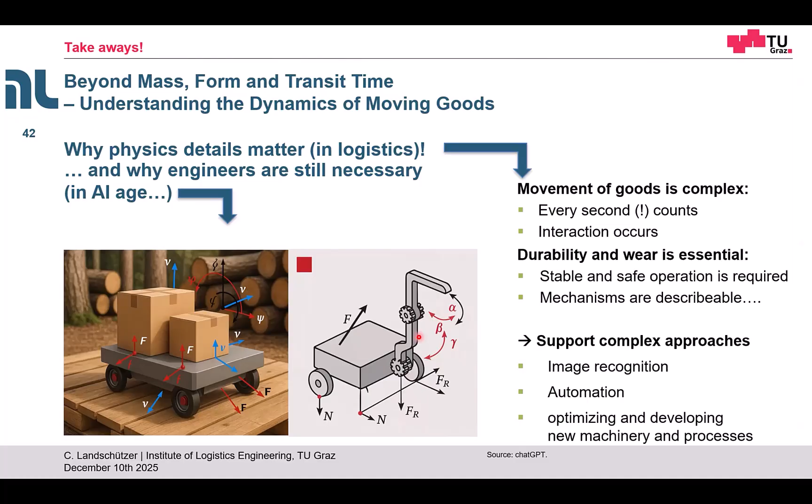And my personal takeaways for you - these are on a completely different side, but addressing something I learned in my now 25 years in Graz dealing with this kind of research. Do the right things, and not everything feasible makes sense.

There's a nice painting called the Turmbau zu Babel. You know how the end of the Turmbau zu Babel is? Babylonian speech confusion. We do not need this in logistics. We have to talk the same language - no speech confusion. So if you do not do the right things, maybe that's the address to us as researchers. We're good at doing things right, but what are the right things? What is important for the future? We have to talk with other people.

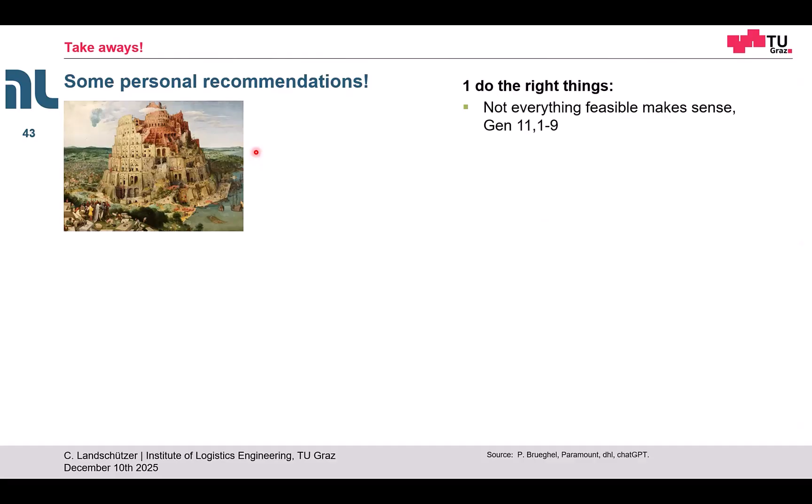Next thing, as I'm coming from Austria, I'm not sure if anybody remembers this - Genesis is Skynet, it's from Terminator, when the machines take over control. Do not feed the AI with everything. We're producing data, we're producing insights, we're producing knowledge. Do we have to feed the machine with everything?